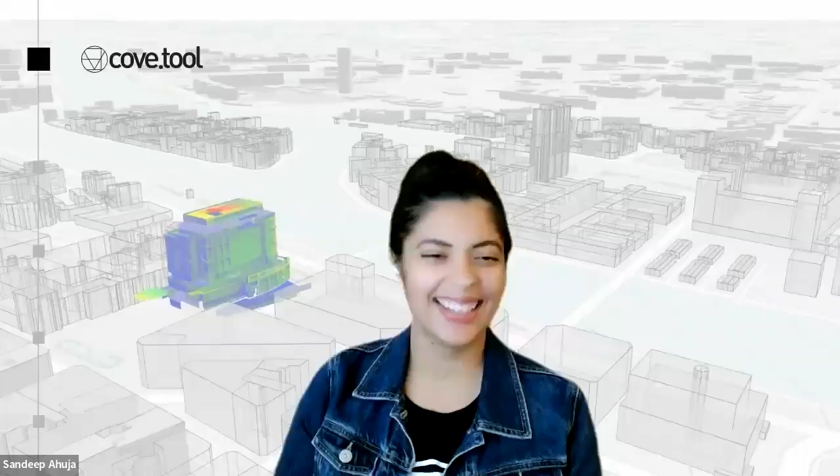That is short. I'm going to pull more out of you than that. Can you give us a little bit of your background before cove.tool? Depends how far back you want to go. I sometimes go all the way back to me being a diplomat's daughter, where I was basically traveling all across the world, all the different countries, went to Tanzania, Russia, Saudi Arabia, kind of all across the board.

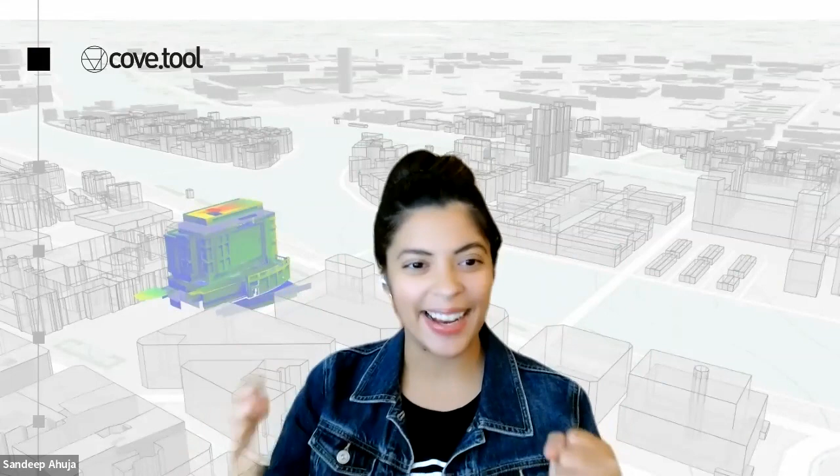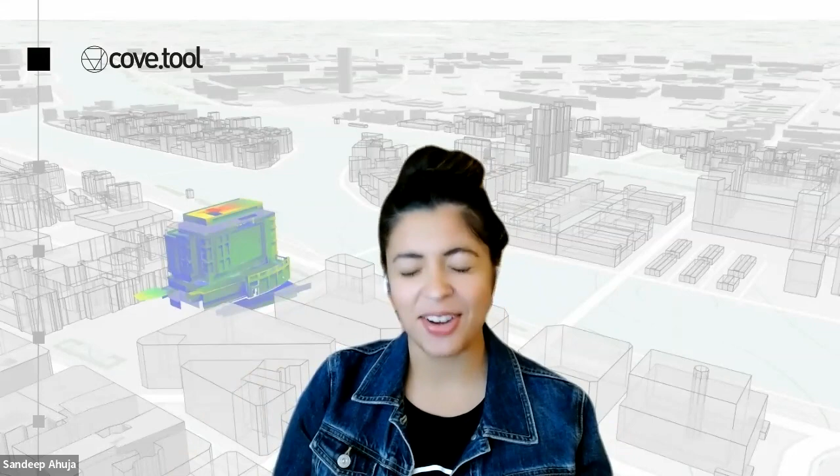That's really what all the way back looked like, and that created my love and passion for architecture. I became an architect, this wide-eyed architect so excited about everything I was going to do and all the buildings I was going to design, and practiced that for a little bit until I happened to sit in a lecture with the late Professor Godfried Augenbroe, who was visiting New Delhi at the time. He talked about how buildings were 40% of all carbon emissions, and I was like, wait, I went to school for 5 years and no one told me that.

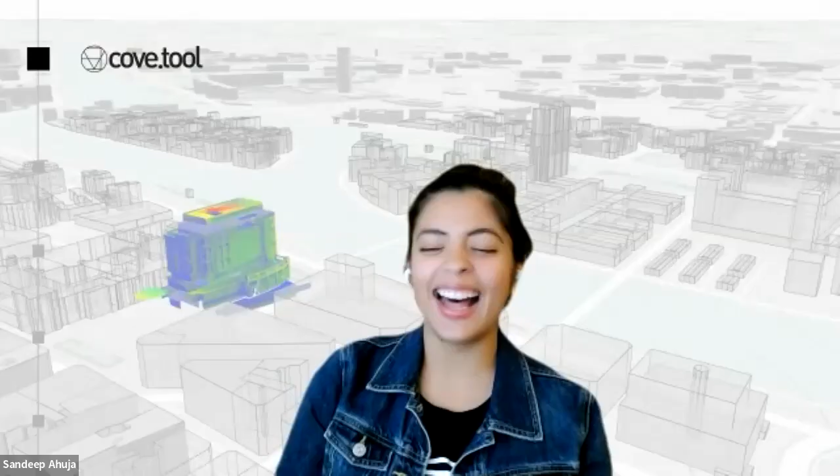No one told me that. So I just waited till the end of the lecture, went over to him, and said, hey, I think I'm going to apply and be your student until I know exactly everything you're talking about so I can go fix it. And he's like, well, give me, in his words, not a shitty application and I'll think about it. That's amazing, what a great response. Yeah, for anyone that's ever known him while he was still alive, that is a very free response.

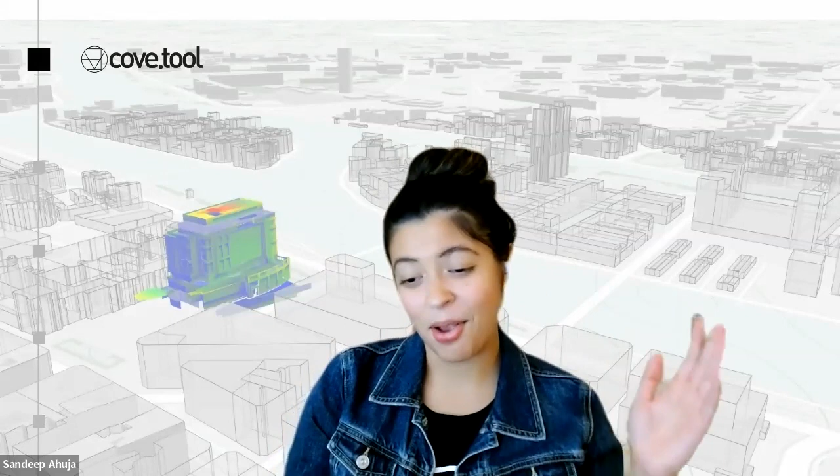All right, so then you did it, you gave him a non-shitty application. I gave him a non-shitty application. I became his student and I became an expert in all things building performance, which is so wide and so vague for anyone that's in that world. And then I went and co-founded the energy lab within Perkins & Will, which is one of the large architecture firms. That was fun, and we grew the team there.

While that was fun and wonderful, I was like, well, let's see what it's like to jump outside the safe bubble and do it outside of that. So then I started my consulting practice here in Atlanta, and we grew really fast. We had tons of projects, we were doing all of it. It was actually really, really good for all intents and purposes, like from me feeling great and making enough money, us doing enough projects, it was wonderful. Only I was not having the impact that I needed to, because 100 projects for a team of 10 is what we were roughly doing per year. I was not going to have the carbon impact I needed to have. So I was like, doggone it, I've got to change what I'm doing. And that's really what got me on the software journey.

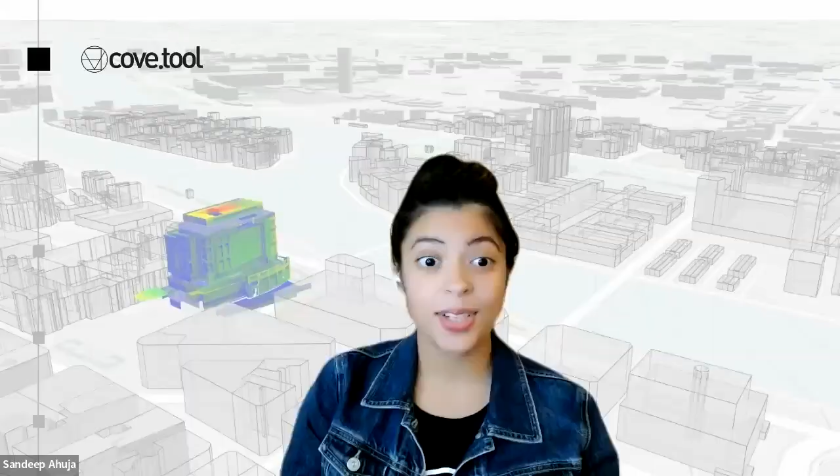Cool, very cool. Fast forward to today, you guys have how many people? Can you talk a little bit more about where the company's at before we dive into more of the details? Yeah, for sure. So fast forward 3.5 years, we are now 75 people, and we just moved into our new HQ in Atlanta. The interesting thing about that story, and it's not a long detour, I promise you, but when I was first starting my consulting practice, it was pretty fresh or green, or whatever word someone may want to use for someone who's new.

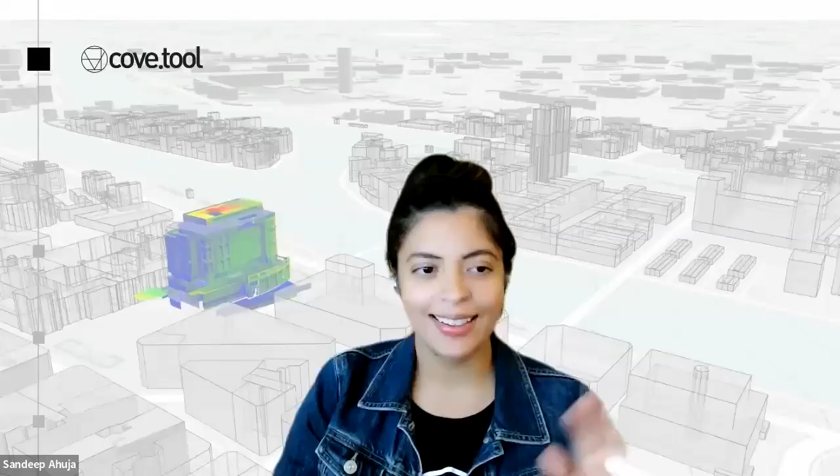When there's a new business owner, there's a lot of scam artists out there. There was this one scam artist who was trying to do a project, all kinds of stuff. He was like, 'We have an entire floor in the Equitable building,' which is a very reputable building in Atlanta. He said if I did this project, I'd get a whole floor. At the time I thought, one day I'll get there, but I do want a whole floor. So that is exactly where we're at now.

We just took the 5th floor of the Equitable building, which is pretty fun. And that only took 3.5 years, which sounds like a long time, but it's really not. In the startup world it feels like light years.

So I was looking a little bit at the company's background. It sounds like you just raised Series A from Robert Downey Jr.'s fund. How's it been meeting with Iron Man and getting to know him a little bit more?

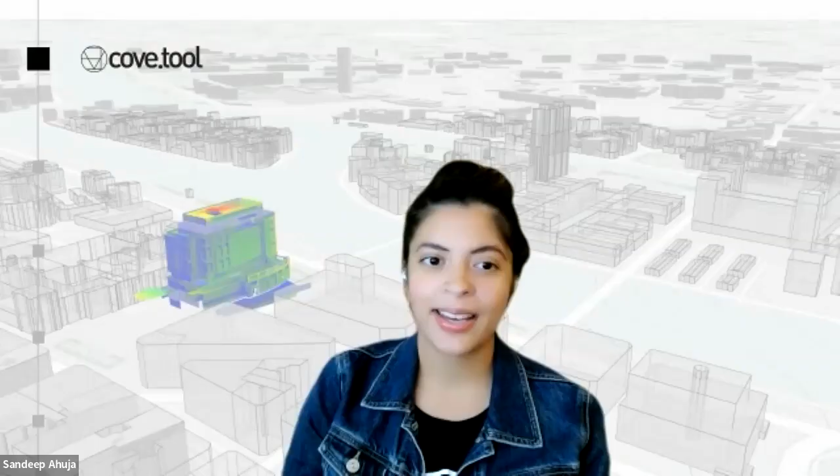Oh my gosh, I'm a super fan. I watch all things Marvel, I'm a big Avengers fan. Not only will I watch the movie, I'll then go watch the debrief of every 15 minutes of the movie to understand all the Easter eggs and all the things. Oh, you're that nerdy. Okay, just to set the stage, that's who I am.

So when I got introduced to Robert, of course it was a super fan moment, but I was meeting him in a very professional capacity because I can't just fan out and be like, 'Oh my gosh, you're the best thing ever, let's take a selfie.' I can't do that. I mean, I could, but it'd be really weird if I did.

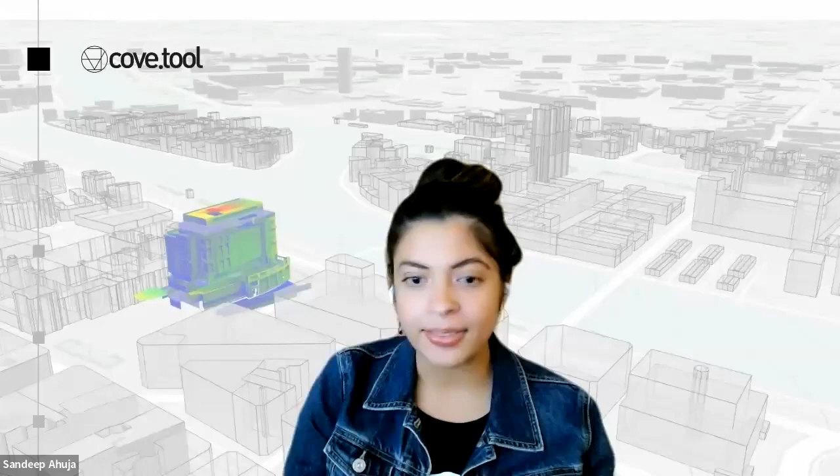So we talked about everything we were doing, and I learned a little bit more about all the things he was doing with Footprint Coalition and his focus toward sustainability. There was so much synergy in the impact that both his fund and our company were working on, that by the end of the conversation it definitely felt like this is something we're going to pursue together.

When I spoke to him, we weren't raising a round because we just weren't raising at that time. He said, 'Well, when you are, let's get in touch.' So when we were, we got in touch. Since we had already connected and there was so much synergy, and because we were growing so fast with all our metrics looking so beautiful, everything just kind of beautifully came together in like a week.

I was also researching the company and saw that your partner is your co-founder, your partner in life is your co-founder, and the other co-founder is his brother. Can you talk about what it's like to build this company and the family at the same time?

Talk about putting all eggs in the same basket, right? All around. Yeah, it's actually really, really fantastic.

Originally, me and my partner Patrick, who's also of course my partner in life, we've been working together from the moment that I've known him. We met at Georgia Tech. We did all our projects together. We went to Perkins and Will together. We started the Energy Lab together. We quit it together. We started consulting together. Ever since we've met, we've not stopped working together.

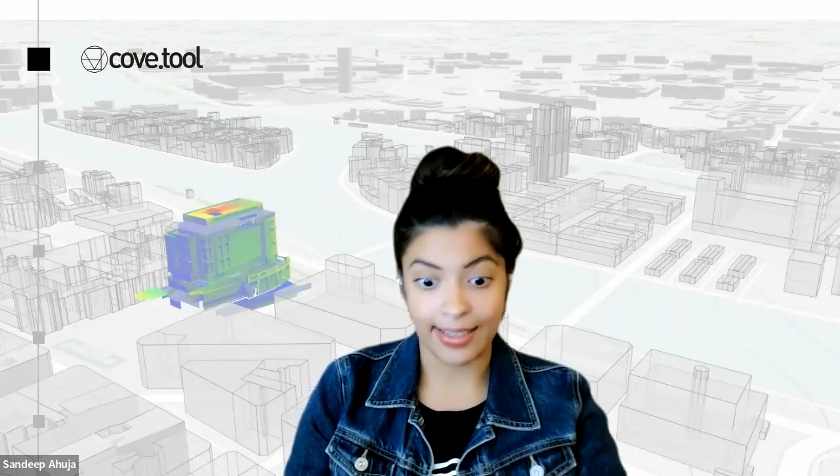We had to pitch it to Daniel because we needed a CTO. We needed a co-founder who was really, really focused on software, because that is not me, and that is not Patrick. We needed someone who could really build the app from the ground up and make it scalable. I mean, I can code, but it will break from time to time, and that is not the app that I needed to build.

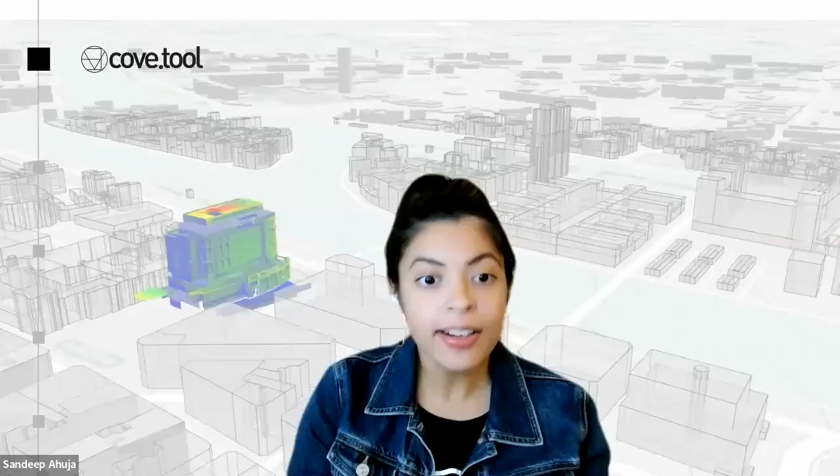So that's where we got Daniel involved. And it was not a great offer that I had to make. The offer that I had was, this is really big, it's fantastic, it can have world-changing effects on climate change. I have no money, but as soon as I do, I promise I'll figure out a way to pay you. And that is the offer that I had to make. And he really saw the vision, and here we are.

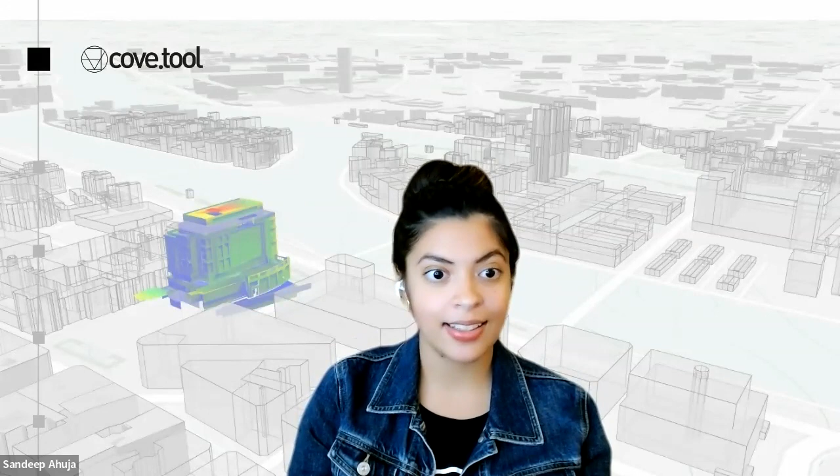Amazing. Very cool. Well, let's dig in a little bit. So we were talking before we hit record about, at one point in my career, I was doing full-time energy modeling. It's been a while since I built energy models, but I have to imagine that when I was modeling, cove.tool didn't exist, and I probably wished it did exist at this point. So I saw something around the automated sustainability consultant. You started this consulting firm and said, I need to scale what I'm doing, I need to affect more than 100 buildings. Can you talk about what automating the sustainability consultancy meant to you at that point, and then how the energy model process just wasn't scalable, and why you needed to build software?

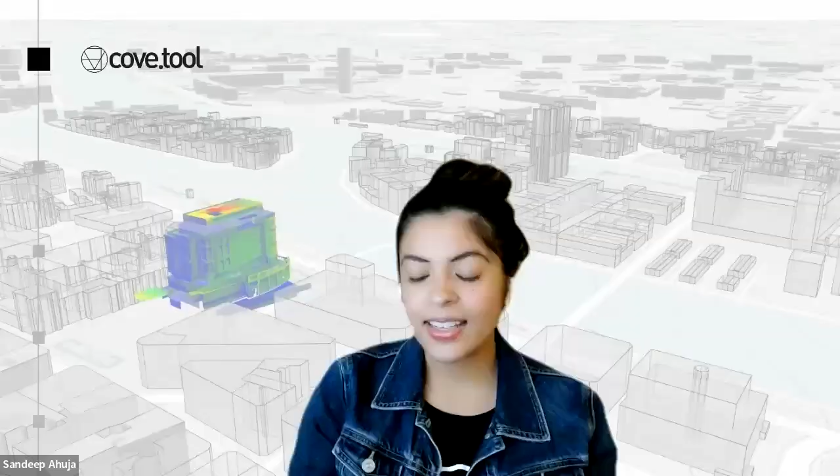Yeah, I can talk about how we even called it that back in the day, which has completely changed now. There's all these many different products that serve many different people and industries now, but let's go back to what it once was.

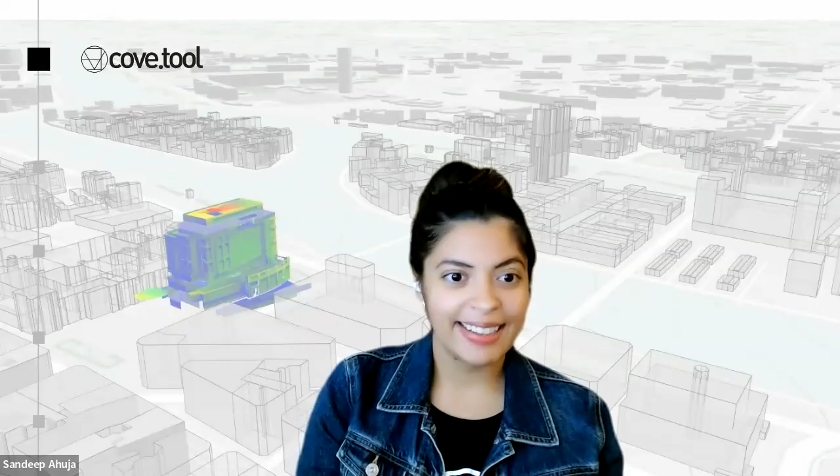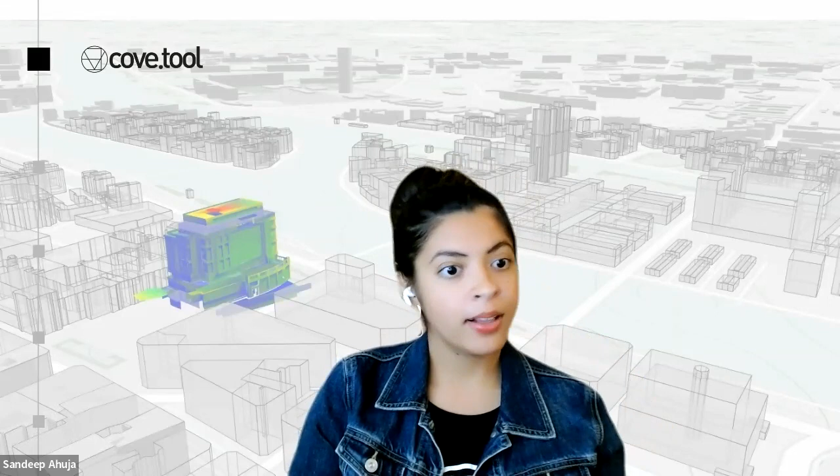It started out like, at the time I was doing taxes, and I was like, well, I used TurboTax. Not to necessarily endorse them, I'm not a sponsor, but that is the app I was using. I was like, this is a pretty complicated form, and I'm able to fill it out with reasonable accuracy. Sure, I don't know as much as a tax consultant, but for most cases, 90% of the cases, I'm good. The 10% of the cases, I'm definitely not good, and I will need a tax consultant. But that was really what I wanted to build for the energy modeling community, where for 90% of the cases, we can get pretty darn close. And when it's on that super complicated, super detailed, super peculiar case, well, go get a super expert. There's plenty of them in the market. Totally, and that was the whole goal.

The reason why I knew we needed it is because when I was growing my consulting practice, hiring was a real challenge. You hire an energy modeler right out of school, and you have to train them from scratch. Once you train them from scratch, you have to teach them all of these inputs. I'm like, why aren't all of these inputs just automated? Shouldn't someone automate them across the world so that it just pulls out the right thing? That's really where it was, because I knew it could be done, and I knew no one was doing it, and I knew I needed to democratize it. The only way to do that is to just give easy access to information. If it's that easy, then you have no excuse to not do it.

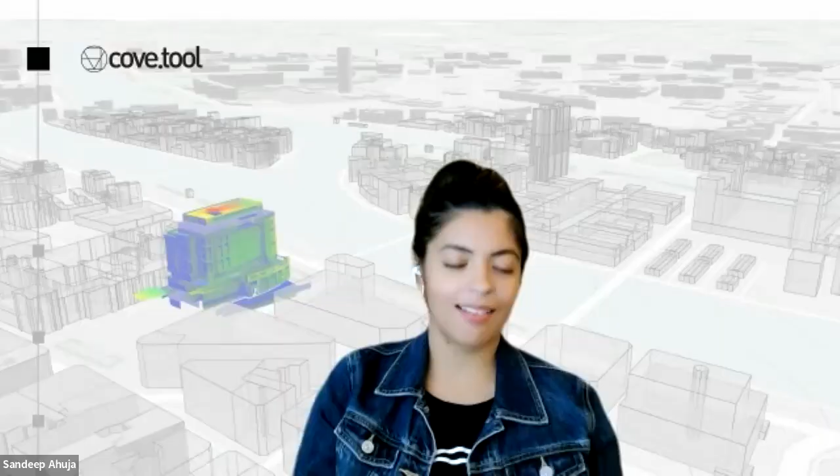Yeah, I remember I was self-taught. I taught myself kind of on my own time at night so that I could take on more responsibility at work during the day. And I remember I took this massive energy modeling one-week course, and they gave me this huge binder, and that was basically what you paid for. I mean, it was a great course, great to be in the workshop itself. Kendra Tupper was one of the teachers, and she's one of the most amazing energy professionals. I still follow her to this day, but she handed me this massive binder back then, and it was all the cheat sheets and inputs you're talking about.

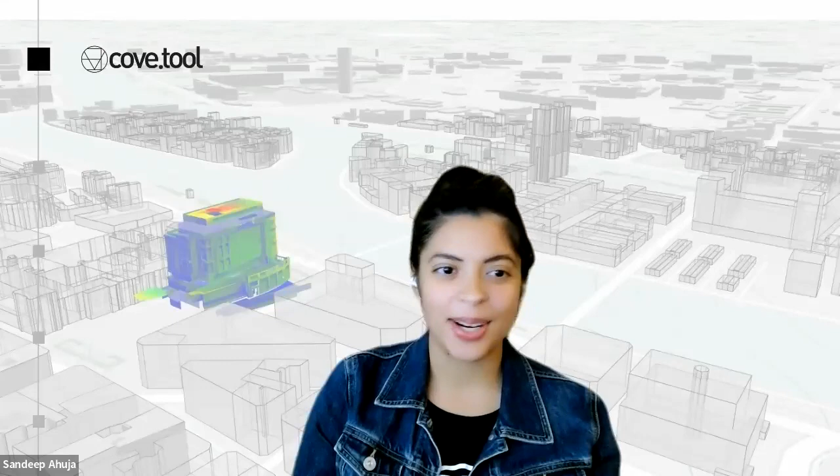Exactly, like basically learning how to use eQuest, which is what I was using back then. And it was like, why do I need all of these cheat codes? Why isn't it in the software? Why isn't it just doing it? Also, why isn't it more pretty?

I also built, once the energy model was run, all of these Excel workbooks to take the outputs and actually make better decisions based on what the results were.

So tuning parametric runs, I did all in Excel for a very long time. It's funny you say it doesn't matter, but it matters so much. We started with energy modeling, but now we've launched a load modeling tool, which is HVAC sizing for all mechanical engineers. There's all these ventilation calcs and really old Excel spreadsheets that everyone's been holding onto for the last 20 years, calling them their firm's cheat codes.

There's a feature called template. You can templatize it and use it over and over again. It's simple.

So these processes, basically the way I understand it is, what you guys said is, let's reduce the time, complexity, staffing requirements, and expertise required to get to this certain point in the energy modeling process.

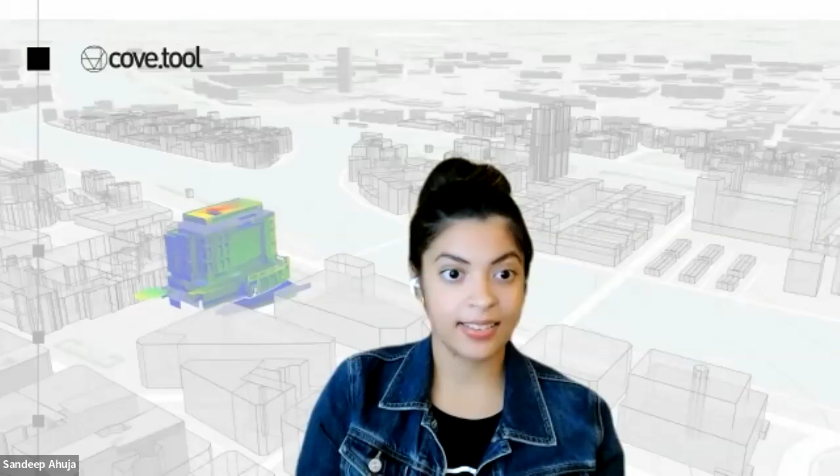So you basically launched the software company from there, when you were doing all this stuff on the consulting side? Yeah, that was basically it.

And when we launched the software, that's when we started getting a good bit of response, as you know, being from the same industry and space, people are pretty vocal. If something doesn't work, they have no problem writing a 10-page email describing what's not working, which I could not have been more appreciative for.

Because we had a whole bunch of beta testers, got tons of feedback, made the software better. It was like, yeah, that's totally a fair point. Yes, should totally keep that, good point.

And despite being more expensive than anything else in the market, we started selling it rapidly. That's when we realized: me, one person, I can do one thing really well at a time. I can either run consulting really well and keep all my clients extremely satisfied, or I can grow this software business. But if I try to do both, I'm likely going to fail at both.

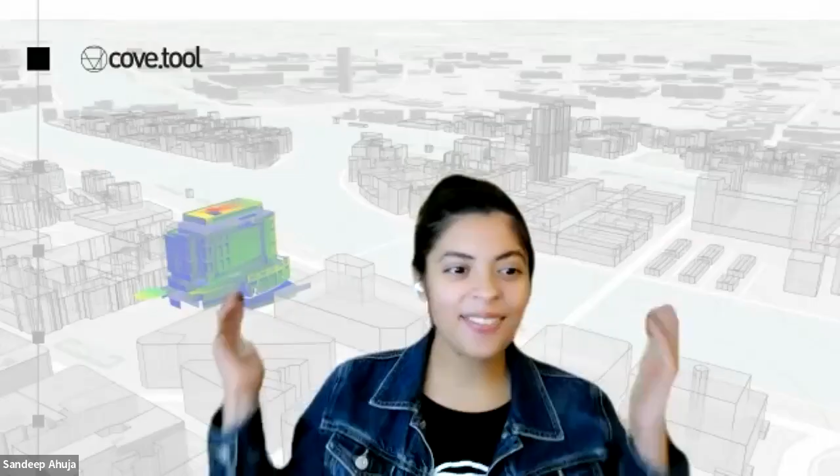I love that. I did the same thing about 6 months ago too. I had a full consulting practice and I said, I've got to focus on Nexus full time. So here we are, that's amazing. We have that in common. You've got to figure it out. Yeah, you got to figure it out.

Okay, so typically when I have tech founders on the show, they're talking about technology they sell to building owners. I'd love for you to describe selling technology to architects and engineers, and how that's different. It sounds like you're doing load sizing now, and building owners and contractors too, but you started out with architects, right?

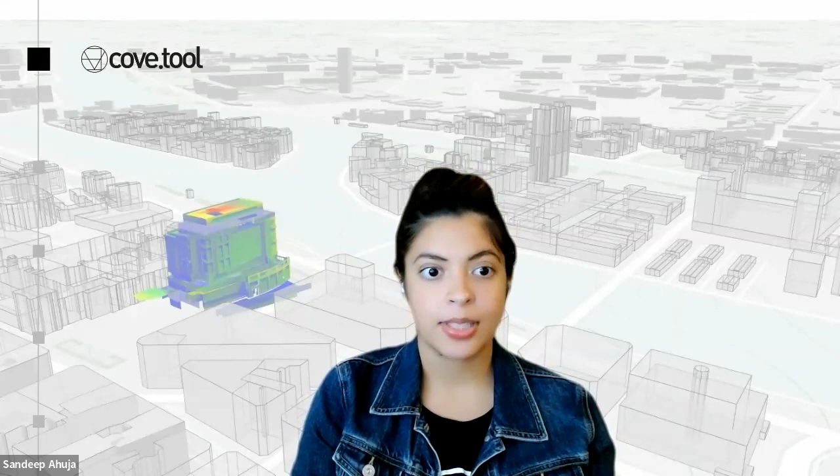We did. Back 3.5 years ago, we started out with architects, then engineers. Now we sell to folks like Skanska, Cousins, JLL. So it's kind of the whole gamut with all the different product lines that we have. Okay, so what was your original question?

What is it like selling it to architects? Well, I was just going to say, you started there because that was who your consulting clients were, it sounds like, right? Not really. I was consulting with owners and contractors too, even as a consultant.

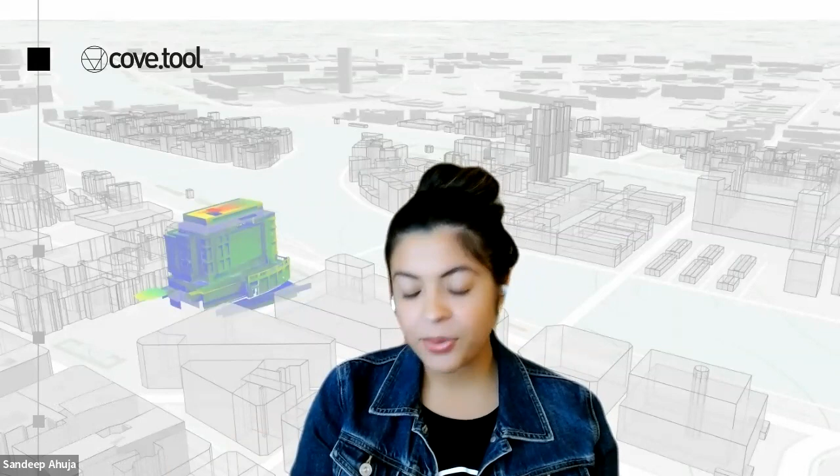The reason why we wanted to start with architects and engineers—historically, in the tech world, you might have already heard of this: that's a hard client to get, a hard one to get on your books. The reason I still wanted to go that way was because of the product roadmap. When I think about something like Revit, which is used predominantly across the board, like 40% of all projects use Revit, that's a pretty high penetration percentage.

We started out with architects because architects are the ones that control the drawing. They control the decision making around the project. Typically, they're the ones who will hire the mechanical engineer, though of course contracts can be laid out a different way. Typically, the engineers will use the same software for easier collaboration. And when all of your technical team members are using a particular software type, it's not like the contractors and owners say, oh no, we are the data experts, we're going to use some totally other software. It just brings that validation ahead of the actual usage.

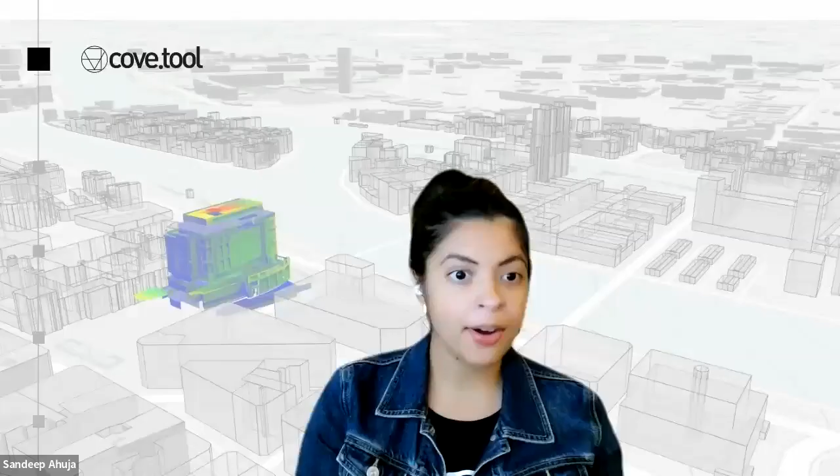Because now that we're the de facto tool for all architects and engineers, it's not really a discussion for owners and contractors. They're like, well, oh, AECOM, great, our architects and engineers are already using it. Oh, DLR, wonderful. HDR, great, they're already using it. So it makes perfect sense. It just makes the whole conversation much easier.

So I feel like while that is the harder route, it is the route that has allowed us to grow by getting credibility first and really establishing, hey, we have been vetted so many times you can't even count on your fingers. That much validation, because every firm wants to go through validation. It's been validated—it works across all of these different workflows that are all unique, that all use different types of software. And if it works for thousands of different workflows, we have some knowledge that it's going to work for you.

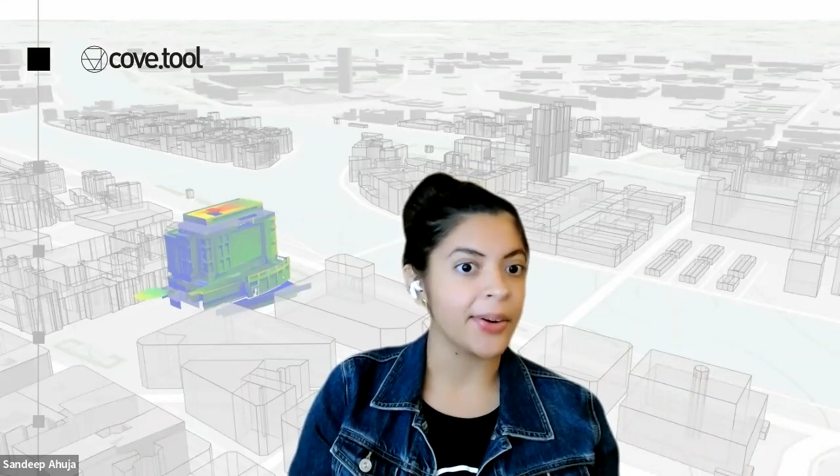So I want to key in on the architecture piece, because whenever I got involved in a project, I was working for a mechanical contractor at the time. I'm way down this progression that you just talked about, and typically there wasn't a model for me to piggyback on top of, which is why I was building one to begin with. Can you talk about why in the architectural process, energy models don't get built until later, sometimes not at all? Back then it was, we need to build them only if they were going for these certain LEED points or LEED credits. Today it's different, I feel, but I'm not involved as heavily as I was at that point. Can you talk about why it takes so long for an energy model to get built, if at all?

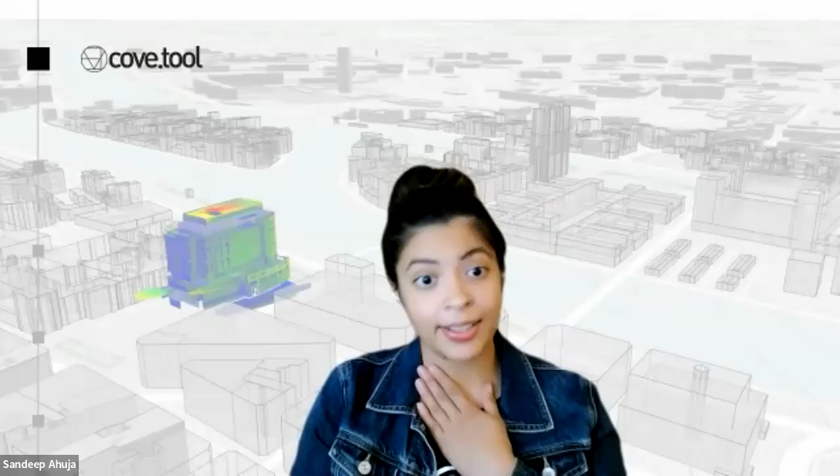I mean, in the old school ways, it definitely does take long. You have to collect all the inputs, you have to get the geometry into the model—my gosh, that is the piece that took me the longest. I used to use a different platform in my energy modeling career, and it only digested part of my Revit model. It digested none of my Rhino model and absolutely 0% of my SketchUp model. And if that's the translation I have from the platforms, and if I'm using ArchiCAD, I'm basically done for—I can forget about energy modeling altogether because nothing is compatible with anything. It just takes that much longer.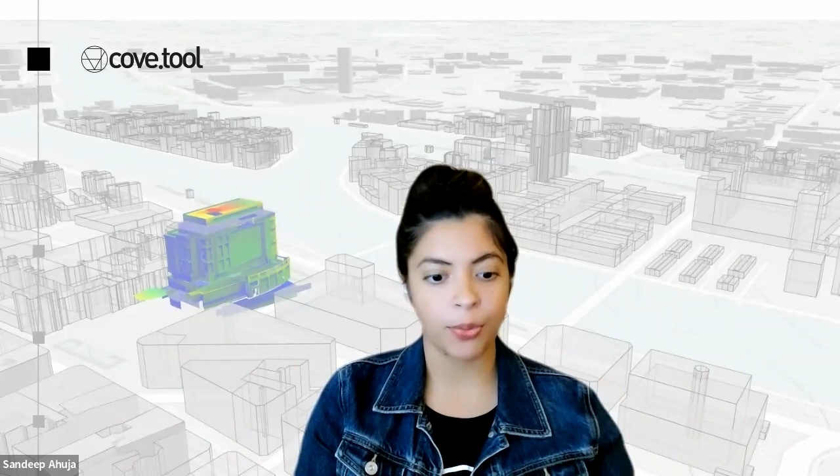So the first thing we did with Analysis Tool, which is one of our product lines, the energy modeling software within cove.tool, we made the geometry translation easy. You can bring in geometry from pretty much anywhere. Doesn't matter how pretty your geometry is, doesn't matter if it's perfect or a closed room, doesn't matter if all walls touch each other, which was a very common and irritating problem. It just works—it's designed to just do the job. So you bring in your geometry from any of the different sources, and then you enrich it with layers of information. You understand where this project is located, you totally know the context, you completely understand what kind of weather there is, you exactly know what energy code it's in, and you totally understand what kind of zoning criteria it has.

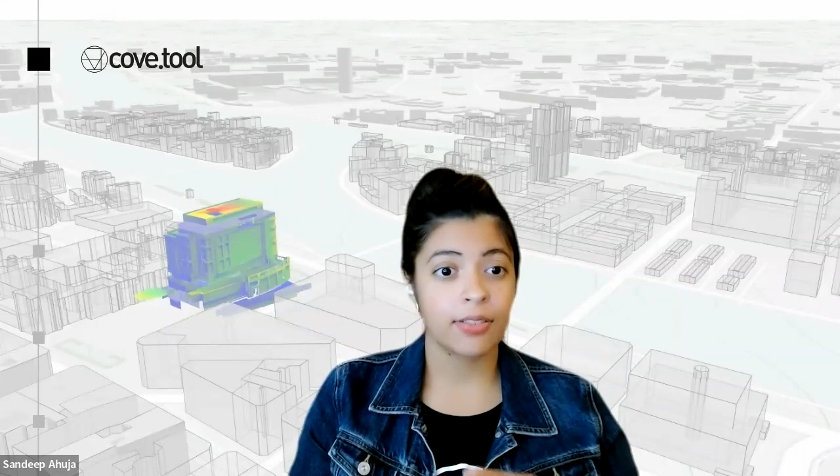Because we're enriching it with so many extra layers of information, things that took hours—like 40 to 80 hours—now happen in about 1 to 2 hours, because you're not doing rework. You're making smarter choices and getting smarter yourself because you can run it more often. If I had to test out 20, 30, 40 iterations, that would take a while. Now I can do that in about an hour, all included. That makes me smarter, so I can say smarter things about my project because I actually know them. I think that's extremely powerful.

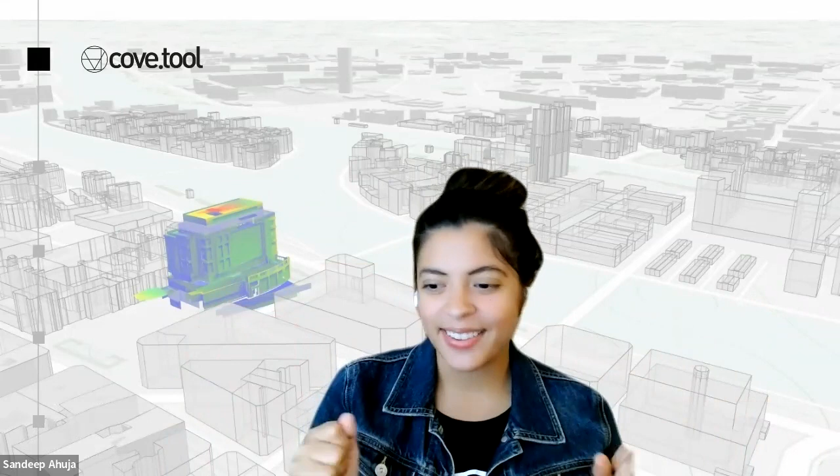I love that question because that's exactly how my brain works—thinking through the progression. One of the common sayings from my mentor was, you can't use a cannon where you can get away with a gun. Not that I'm in agreement with violence, or saying no to all firearms, but the analogy was hilarious—you've got to use the right tool for the right stage. That's really how we think about the entire product roadmap.

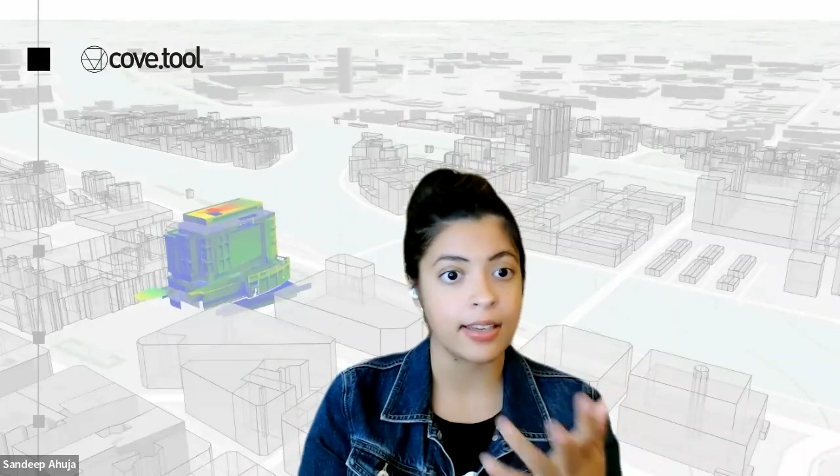So you start in extremely early design. All you're doing at that point as an architect is sketching—testing out different massing, testing out different shapes. That's really what the drawing tool is for, where it's free for all. There's no subscription, you don't have to pay anything to use it. You can draw it and export it out in any format—take it into SketchUp, Rhino, Revit, ArchiCAD, IFC. No matter what you want to do with it, you can take it out, but you can draw in-app and really get your massing going. So that's the drawing tool—super early, pre-design phase.

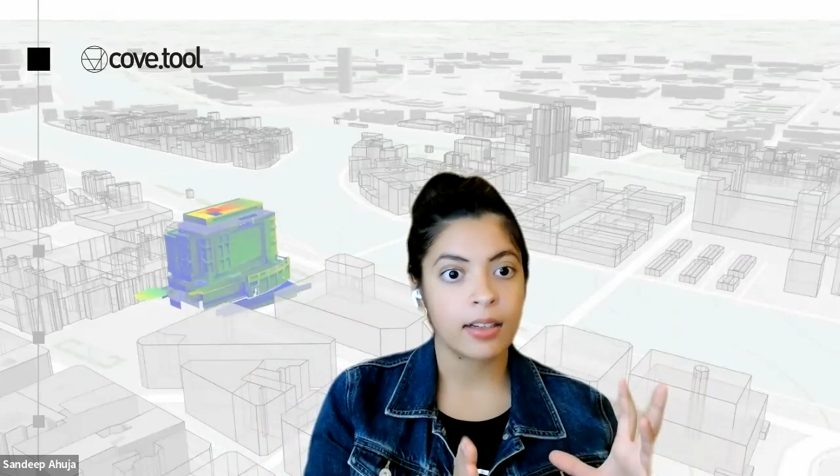Once you have something, you want to start studying it—understanding what's my daylight like, what's my radiation like, what's my energy, what's my embodied carbon, what's my operational carbon, all the different typology, what's my water use. You want to enrich it with that information so every time you change something in drawing tool, you can see that it changed your energy, your carbon, or your water use entirely. That's what the analysis tool is for—used in pre-design, schematic, concept design, early design development. More often than not, architects at the schematic design development phase will invite their mechanical engineers or energy modelers if they already have them on board, which in many projects, as you know, is not the case.

They'll invite their engineers to the analysis tool collaborative platform, because it's 100% collaborative since it's on the cloud. They'll say, here's the automated inputs, do these look correct? Do you want to adjust them? Do these numbers look right? Can you give it a gut check so it doesn't take them too much time? Give like, okay, this feels about right, or oh no, this ventilation number looks totally off because we're doing something completely unique and we can't use the automated input.

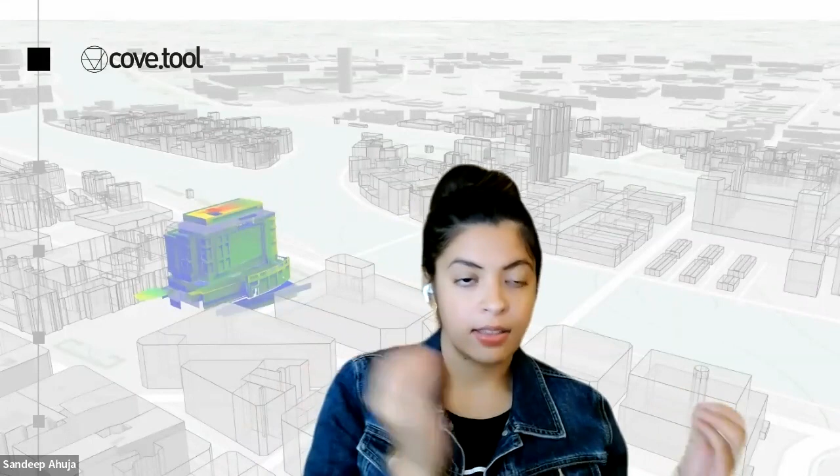Whatever that may be, they go through that in the schematic design development phase and really move through the optimization, where they're running thousands of iterations to find the absolute lowest cost way to get to their energy targets, whether code minimum or high performance targets, whatever those are. Once that's done a few times, which happens quite a few times through schematic and design development, depending on the team, they may do it once, they may do it a couple times.

They can actually export directly out for code compliance modeling with Open Studio, which leans very heavily, thanks to the support from Department of Energy, on the Energy Plus model. And we've built that collaboration and integration with it.

All the while that detailed energy modeling is happening for compliance, you can also go in with your detailed load model and really run your 8760 model for the full year, which will get you all the way to construction drawing. It's kind of the first time, because I missed this in my previous life when I was a consultant myself - why do I have to always switch software from early design to compliance design? That was a pain, it took my team a bunch of time, and frankly I didn't like that because I wanted to be more profitable. So it bridges that gap for the first time, so we don't have to waste all that effort we make early on and then start again later.

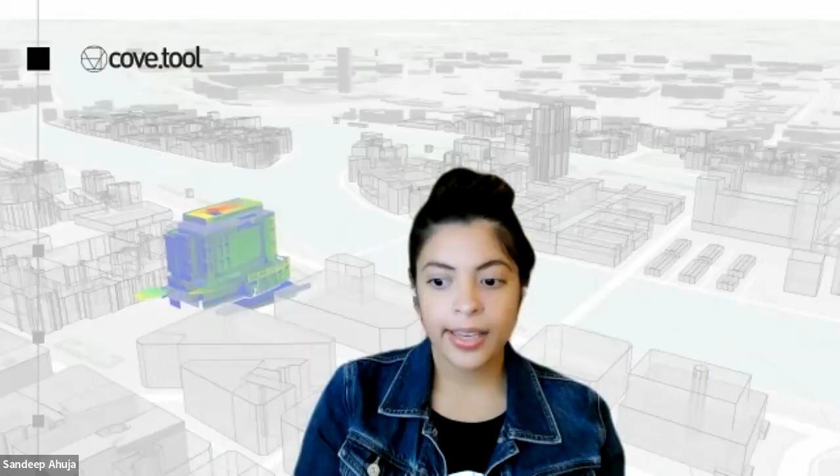Absolutely. How about when you get into handover and operational phase? What are some of the uses, and what's an energy model detail like then? So from a handover phase standpoint, of course, it's still that compliance level.

We typically haven't dabbled much in the post-occupancy or operational stage. Of course, an Open Studio model is an Energy Plus model, so there's no reason one couldn't use it for that after a calibration has been completed for operational purposes. But of course, that would require a full calibration by an expert. That is not automated yet.

Not yet, totally. I also had Excel workbooks for that as well. I could pull them out if anyone wants to create a SaaS company out of that. There you go.

So you mentioned all these different parts of the product. Can you talk about all the different things you guys have built over time to make this process easier? What's interesting is it sounds like you're selling these different features to different stakeholders in the process. Can you talk a little more about that?

Yeah, absolutely. If you think about the optimization piece, that's where you're really hitting the nail on the head, because you have a project budget, you have your energy goals, whether self-imposed, LEED imposed, government imposed, wherever these goals are coming from. There's some goals, unless you're in a select few states that have no regulations. But most of America and most of the world, there are energy targets you have to get to. And there will be more over time.

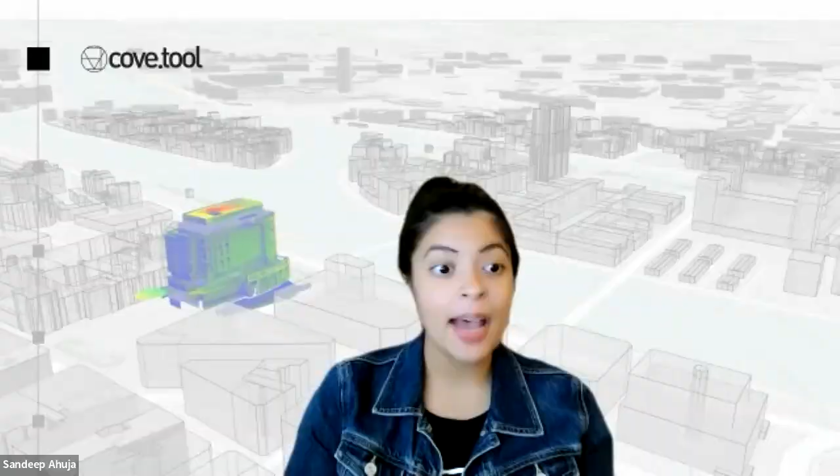Exactly, and it's getting more and more stringent across the board. Even if you look at Atlanta, where Georgia's not known to be the most progressive state, we just went through a major overhaul last year where our energy targets now require us to be 40% more efficient than just the year before - that's a big deal. 40% is a really, really big deal. And that's happening across the board, no matter what state or location you're in. So since energy codes are definitely getting tighter, and even if they're not, they already exist pretty darn tight, and there's a project budget we have to get to, now it's all the variables in the middle.

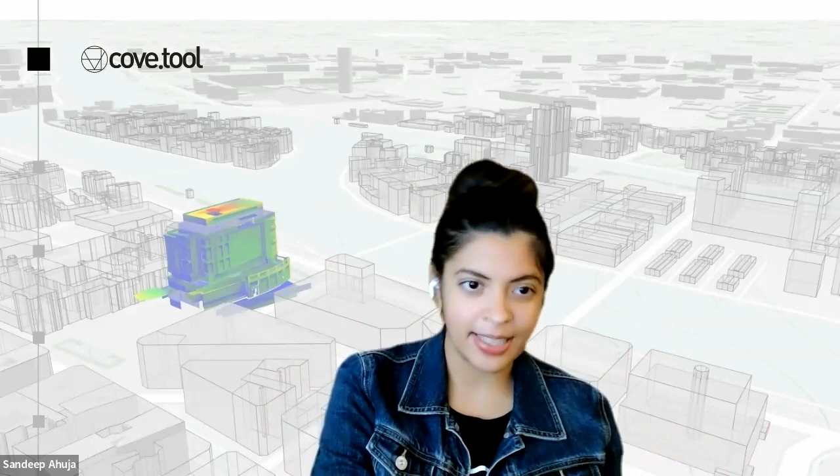How do I match these two? How do I get to these codes with this budget while getting all of my design, while making sure I get my square footage, while making sure my building is wonderful and great and leasable if it's an office building or whatever. Those are the decisions where developers find the most value, where they're not necessarily trying to do the optimization themselves, but get a quick gut check and create a nice collaborative workflow.

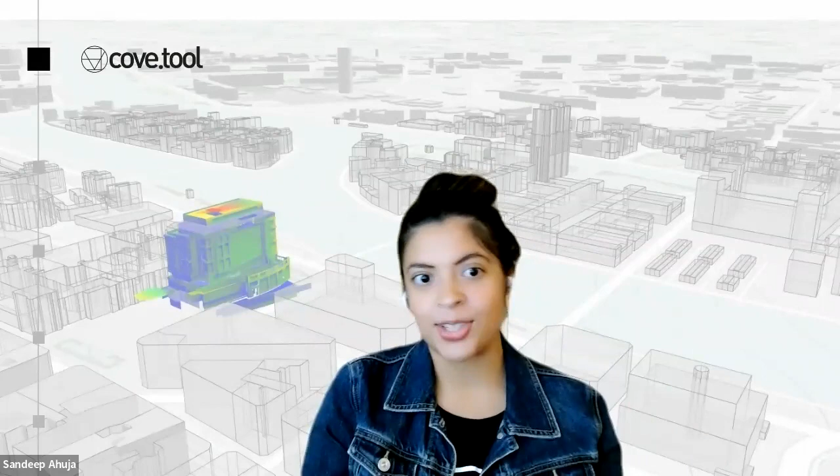For example, if I'm the project manager at Cousins and it's my job to build this office building for this project budget, hit this criteria for energy, and I tell the architecture team, hey, test out this glass type, and they say, oh, it doesn't work. I don't have any visibility into that. I don't know why it doesn't work. What does that mean? Do we need to change some other variables?

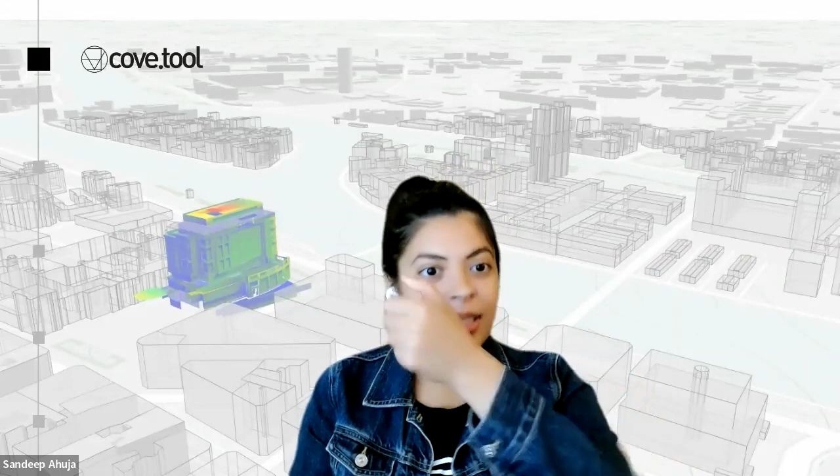That's really the clarity that the cost optimization provides, where you can list out all of the variables. I can look at 5 different types of glass, 10 different types of insulation, different mechanical systems, although that's typically not up for debate for some developer-driven projects. You put all of the variables that are up for debate and figure out exactly, transparently, the lowest cost way to get somewhere, and know that as a team together.

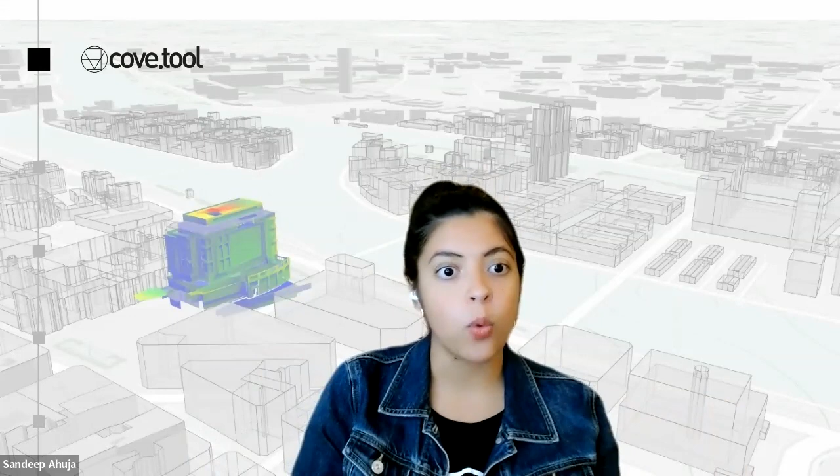So when the architect changes something in the geometry, the design, the shape, or what have you, it trickles down and you can see, oh, that thing we just changed also means we're going to need to change our mechanical system. It also means this optimized solution we had is no longer the optimal solution. We actually have to add a few sensors here or what have you. So it creates this interconnected web of information to really empower smart decision making as it relates to the budget, which I think was critically missed for, forever.

Yeah, and I'm picturing in my eQuest days taking a model and sharing it with someone to get their feedback. That was not even possible. That would be fun. Try sharing that to an owner. Oh my goodness. Oh my God.

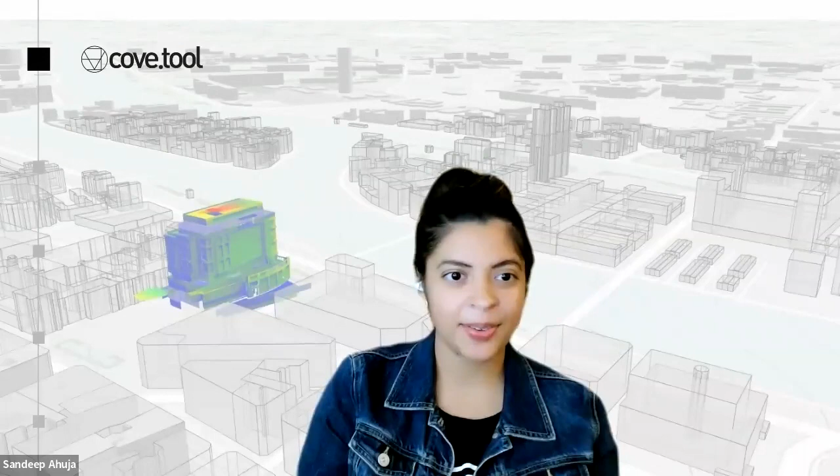Yes. So in today's world, you said office buildings, let's use that as an example. They have regulations hitting them, they have tenants getting more stringent around what experience they need to have, and the landlord's sustainability performance. You have employees deciding whether they want to go back to work or not, right? I'm not trying to go back to the office. LPs are down their throat, right, with sustainability. So the ability for them to have this collaboration engine and optimization engine is really what it is. I need to optimize for all of these different factors.

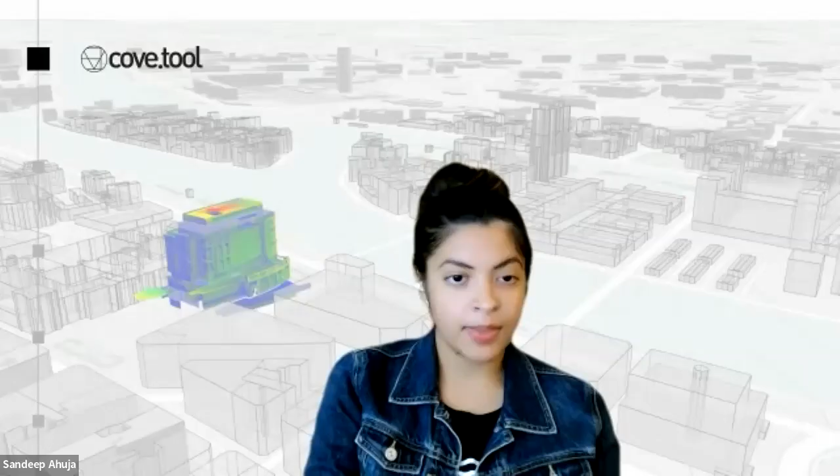That's awesome. Tell me about this cost database, because you guys built out this code database, this system database, this materials database, I'm sure, to be able to optimize for embodied energy and things like that. And we also partner with manufacturers for the materials database. So we have partners like everything from a glass manufacturer like Solarban, to an insulation manufacturer like Rockwool, all the way to a mechanical ventilation manufacturer like Inverid. So it's all varieties of products that affect building performance.

We're partnered with them, so not only do we get accurate data on the performance, which of course we validate, but also their current cost, whatever they're wanting to put out there in terms of cost. Of course, we're not quoting products, like if they actually give a different proposal, that's perfectly fine, but we even add transparency into that process.

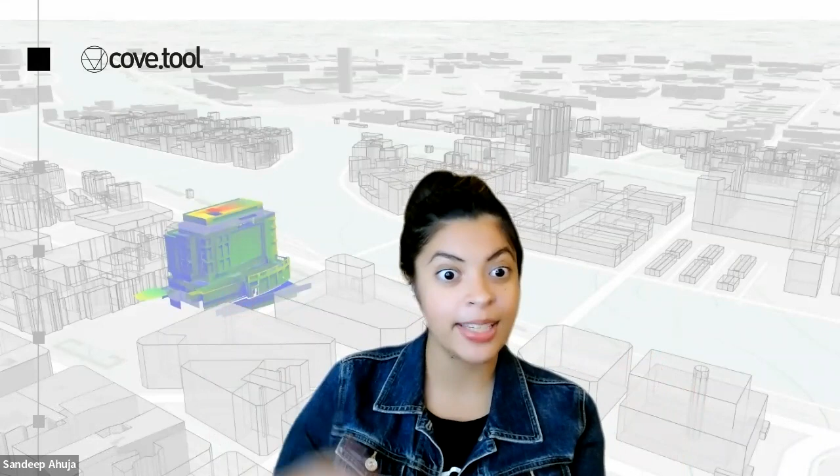So after you run the optimization and you learn that, oh, this particular ventilation system is the right thing for me to do, right then and there, instead of having to call a bunch of people, you can say, hey, can I get a quote on this? And then they can make you a real-time proposal on your project because you can share and connect that information through and through. That's cool. Not super sure if that's where your question was going at all, but you talked about materials and I just got going.

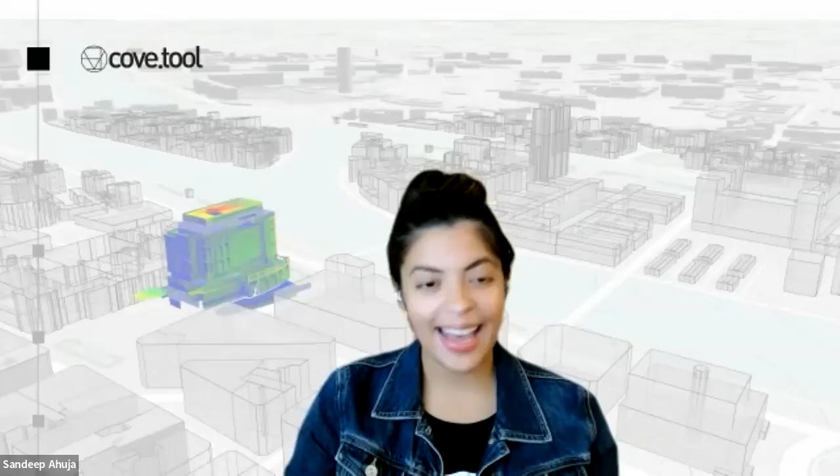So that's like equipment and materials costs. What about figuring out the cost difference between this system installed and that system installed? How do you guys accomplish that?

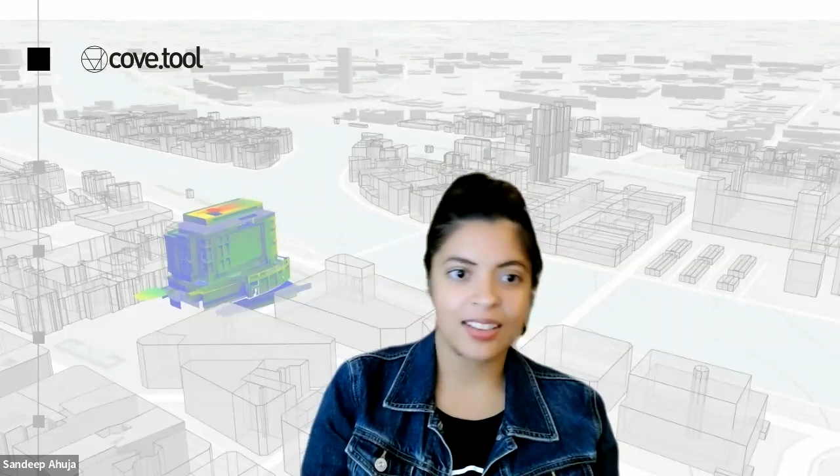In terms of labor costs, we definitely have a database that we've created. We lean on industry standards like RSMeans and our strategic partners across the board, but we all know those can be good and bad depending on what it is you're looking at. We've got to be pretty real about that.

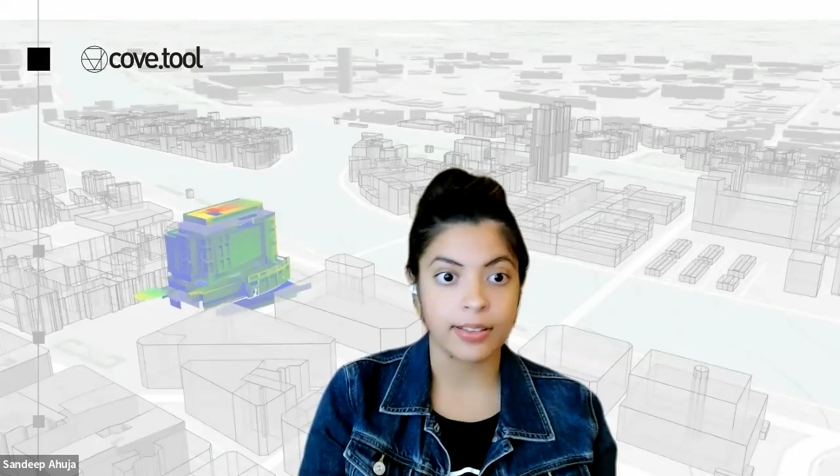The way we've set it up is for a really solid apples-to-apples comparison until you have a cost estimator. So if you've already hired a cost estimator, or perhaps if you're collaborating with your pre-construction team—which I strongly support collaborative workflows—just invite them into the platform and they'll add actual real-time values. In markets like these, there can be giant bubbles that won't be within any set database, even though we run quarterly cost surveys and have an in-house team that runs QA and QC on all our cost information to make sure it's valid, accurate, and makes sense. These are certified cost estimators, but we allow teams to go in and enter it themselves because that information is so variable.

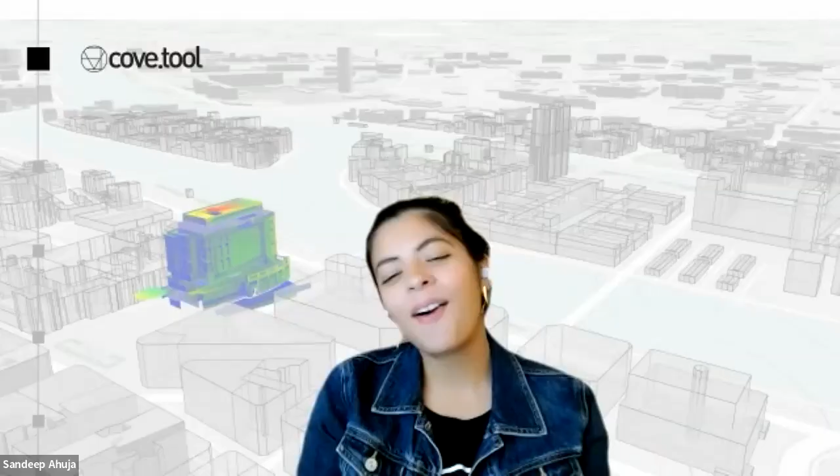Yeah, totally. This is another Excel spreadsheet that I had, by the way. You have all the spreadsheets. They're probably totally—you can't even open them now because they need to be updated with the latest macros or whatever. But yeah, I had all of these.

The reason I'm so excited talking to you is what I was doing was really important at that time. I was trying to convince people to make a different decision than they were planning on making if I wouldn't have been doing that energy modeling, right? So what you're doing is making that easier, quicker, more collaborative. I'm super excited, that's really awesome.

Thank you. You mentioned you guys haven't gotten involved much in the operational phase. I'd love to hear your thoughts. There's a lot of hype around digital twins and operational phase software platforms, right? In fact, that's a lot of the topics we discuss in this podcast—usually, how do we run buildings more efficiently?

I'm wondering—so there's that hype, but there's also a lot of research papers. During my time at NREL, there was a ton of just, here's how we can use energy models in the operational phase, blah blah blah. So I feel like there are those two ends of the hype, but if you actually look at the number of energy models being used day-to-day in the operation of a building, it's probably very small. Can you talk about your thoughts there?

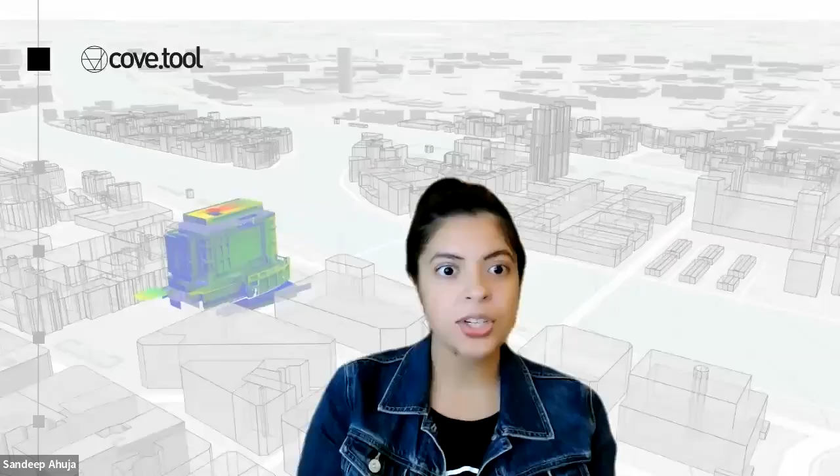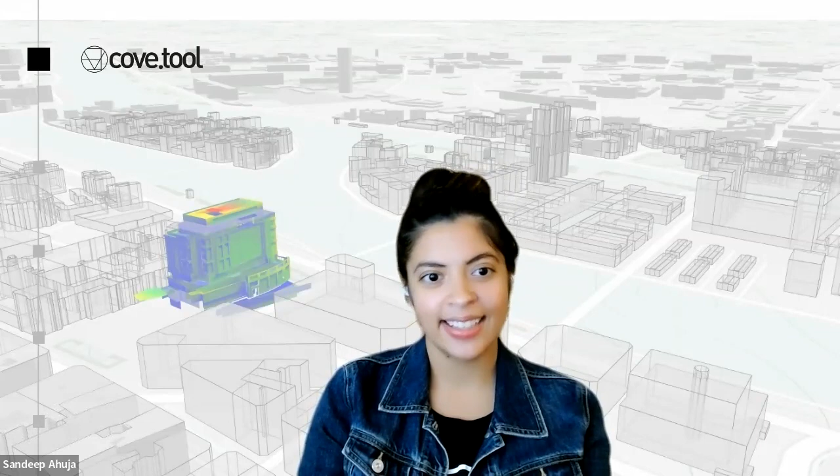Yeah, for sure. The way I think about operational and the digital twin hype, I think it's meaningful. The way we've chosen to tackle the problem, for a very specific reason, is the design phase, because I'm a firm believer that you solve the problem before you create it. I don't want us to create awful buildings, build them, and then figure out how to run those efficiently. I'd much rather us go down the path of designing great buildings.

And then, of course, it begs the question: well, what about all the buildings that are already here? Well, of course, you absolutely still need to do all this optimization for renovation and retrofit projects too, which, by the way, we do tons of—but it's still about solving the problem before it becomes a problem.

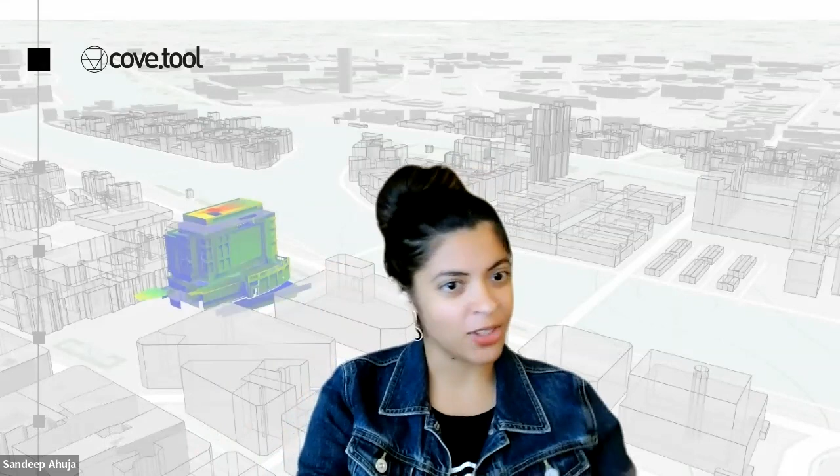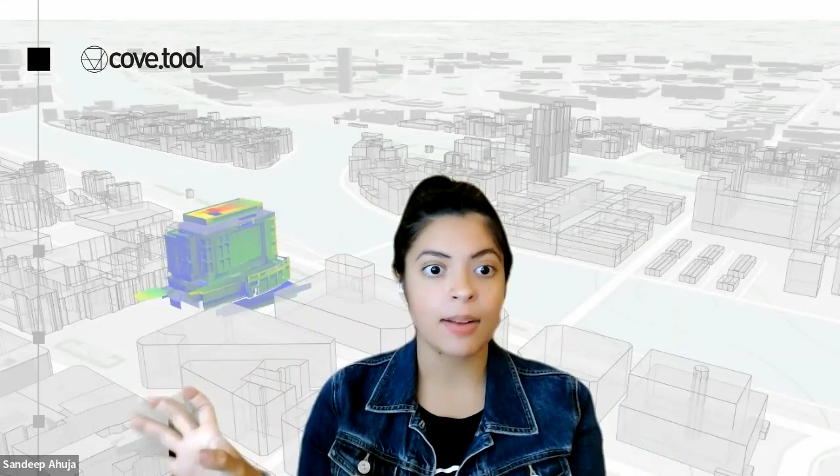It's like insulation, right? I want to put it as close to the outside as possible to stop the heat before it comes in. I'm not going to put a layer of insulation two feet inside my building and say that should do the trick—collect all that heat and tackle it later by just sizing up the mechanical system. That's what I think happens when we focus predominantly on the operational side. Not that it's not a big problem, because if it's already built, which a lot of buildings are, we absolutely have to fix how to run them better.

But a majority of the buildings are going to be built from now until 2050. I'm currently focusing 100% of my efforts on the ones that are coming, just making sure they come out better, so we give the digital twin guys an easier time.

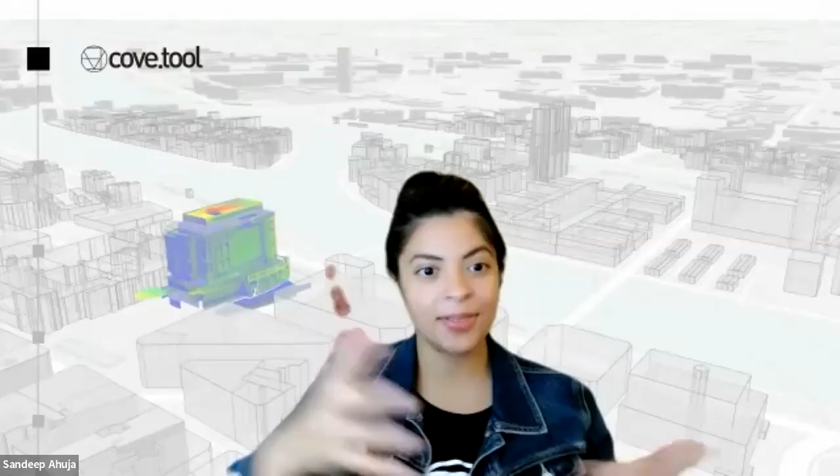There are so many great players in that space that we have an open API for, so we can collaborate back and forth, create easy communication and solve data challenges together. If they need information like what was modeled, we can show exactly what was modeled and connect that gap. That hasn't existed before because nothing has an open API, but we do. So you can take your data from the modeling phase to the construction phase to the digital twin phase for the very first time, and see that loop all the way through.

You can finally start answering, how accurate was the model? Why wasn't it accurate? What could we do differently next time? How can we as operators and owners get smarter in our next model, because we know how we build and we know how we operate. So that's definitely possible through the API, but we're not personally pursuing it.

Yeah, I love the transparency and thinking. Thank you.

There's so much opportunity there though. I feel like I've been doing a lot of writing and speaking recently on this next phase of operational decarbonization technology, and a lot of the opportunities are in how we can create better and easier lists of retrofit projects for people, how we can help them make better decisions. That whole section of the journey is all enhanced, or even just possible, with an energy model. So I feel like that has to be coming at this point.

Hopefully people don't build new energy models when you guys already have one built. Yeah, I mean, that's what the API is for. That's what the API is for.

Let's connect it. Okay, I think my last question is around what's next in energy modeling, and I'm going to kind of lead you. I feel like what's next is helping make better decisions around electrification. Is that one of the areas where it's becoming more important?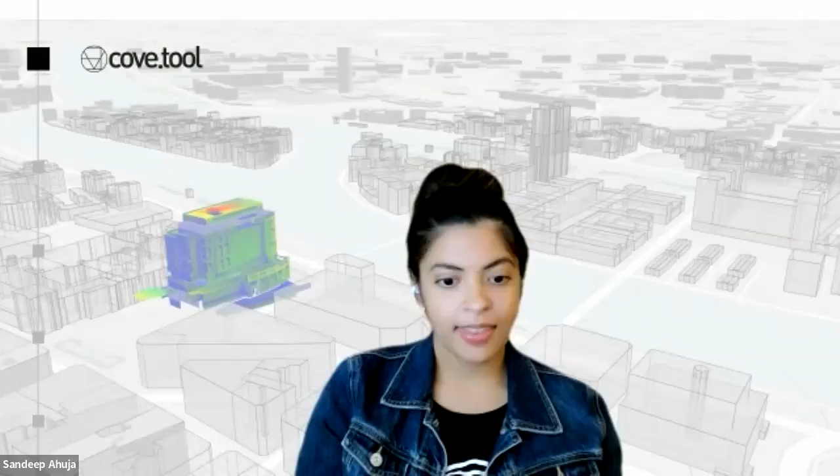I mean, I think electrification has been important for many years, and it should have been important long ago. That's already a given in my mind. We're already focusing on that, we already need to be focusing on that. I really think the next big thing, or at least I don't know if that's the next big thing, there's a series of things we all absolutely need to be doing for this world to have a fighting shot to bend the curve on climate change. Because knowing your background, you probably follow the science as closely as I do. We don't have that much time left.

So I really think that the next big movement is interoperability and connectivity, and that is exactly what we're focused on. The reason is, yes, energy modeling is super critical, super important, but not as a standalone.

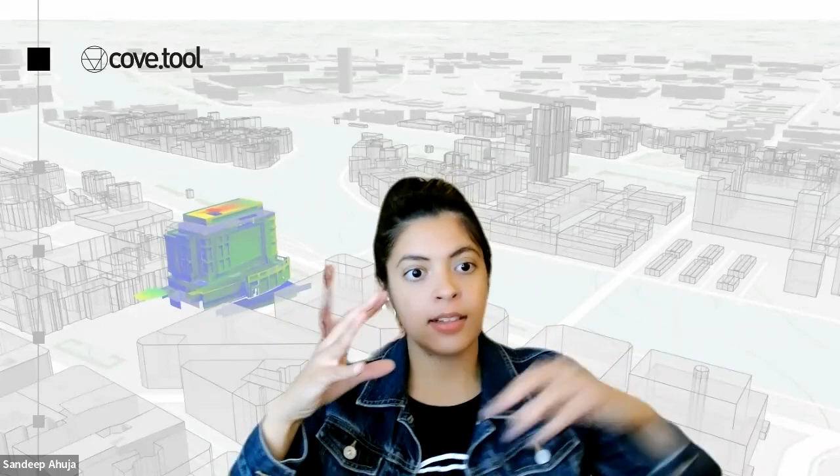Energy modeling is almost meaningless if it's not plugged into cost estimation. It's pretty much meaningless if it's not plugged into the agendas that architects care about. No one cares about energy modeling if it's not plugged into the agendas that the developer or contractor cares about. I think creating that collective circle of the network, interconnected information that enriches each other for better decision making, is where it's headed. It's not 'let's do design, oh, let's also do energy model.' It's 'let's do design together' — that's what's next.

Love it. And it seems like you guys have been thinking about that from the very beginning, the way that you built the tool.

I want to circle back on electrification because I'm curious how an energy model can aid in that process. Maybe a little more context: when I'm trying to electrify my home, and it's not a good payback at all to do that, I need to optimize for other things. It's really difficult, even for me, someone who has built energy models for a living, to figure out what my actual return on investment will be.

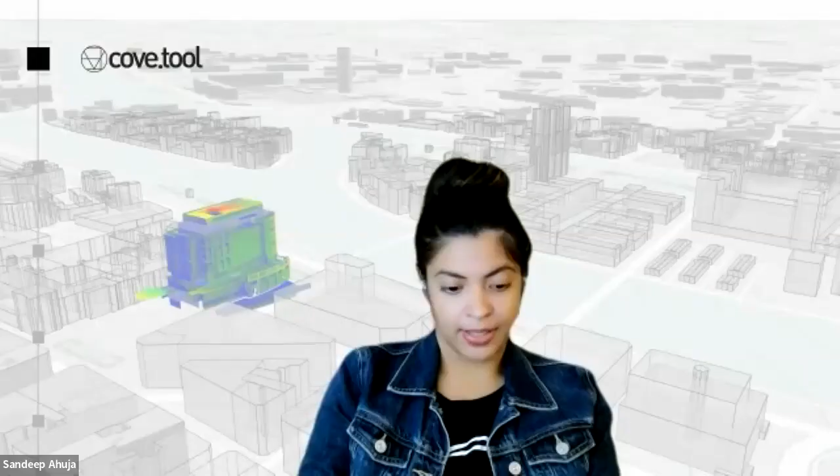So can you talk a little bit about how electrification can be easier with energy modeling? I think it depends entirely on the objective. If the return on investment, and let's say there's a carbon tax, the equation starts to change. There's other ways you're thinking about the premium you put on your future, and many portfolios, like the largest LPs and real estate developers, have started to put value on the investment and the risk mitigation. So as you put more dollar multipliers and factors into it, the calculation absolutely starts to change.

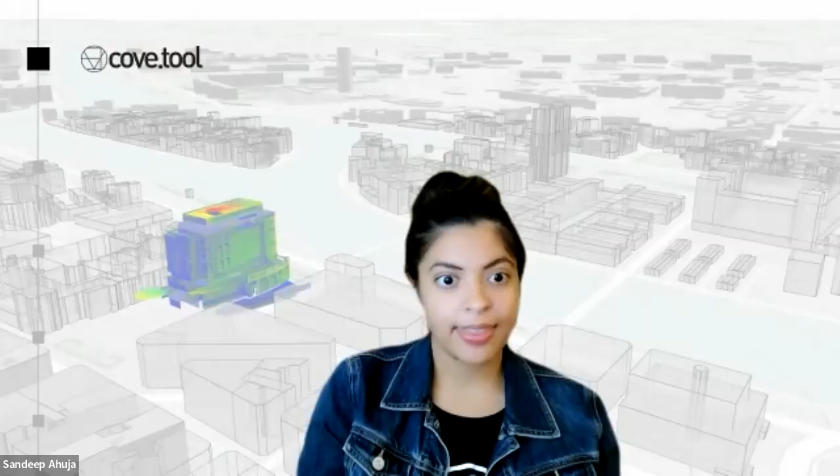So as we're thinking about the net carbon that it's causing, not just the site but the source carbon, and then if we keep zooming back and run the optimization with the source carbon, I think that just makes the whole calculation a little bit easier. And I think that's where an energy model can help.

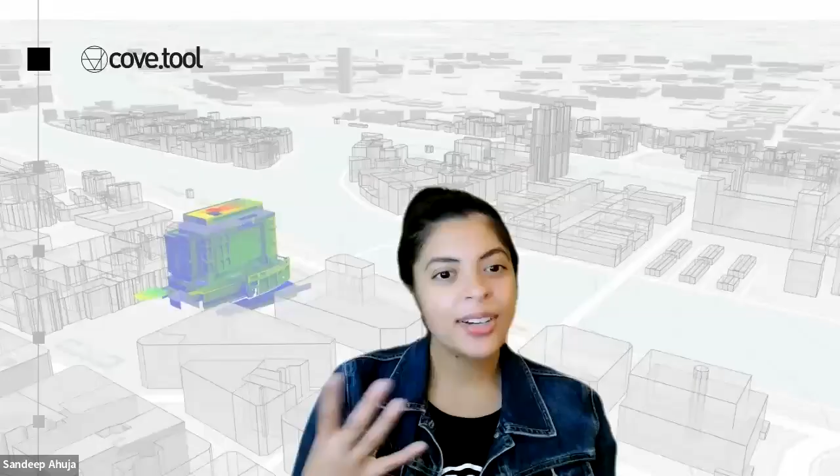Love it. All right, let's end with Carveouts. But first of all, thank you. This has been super insightful, but also a little bit fun. It's a little bit like therapy for my past self, so I'm feeling like I'm sending vibes to my 23-year-old self. And I rarely get to geek out on this level, James. There you go, I rarely get to geek out on this level. This is so fun. That's awesome.

Cool, so I like to end with Carveouts. Are there any books, podcasts, TV shows, movies, what didn't I name, that you'd recommend personally or professionally that people should check out?

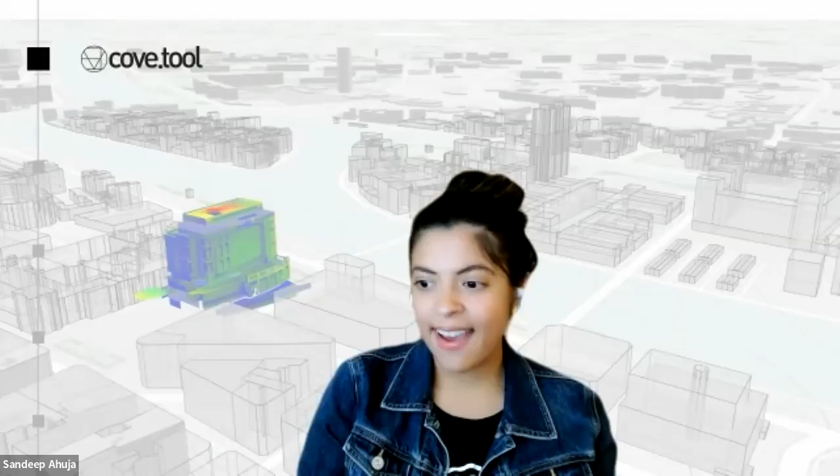Yeah, it was about a month ago, I read this really awesome book, it's called Amp It Up. It's from, I want to say, the CEO of Snowflake. I forget his name, but I'll send you the link after this. It's fantastic. For anyone that's building a business, like yourself or myself, I think it's just a really, really cool book.

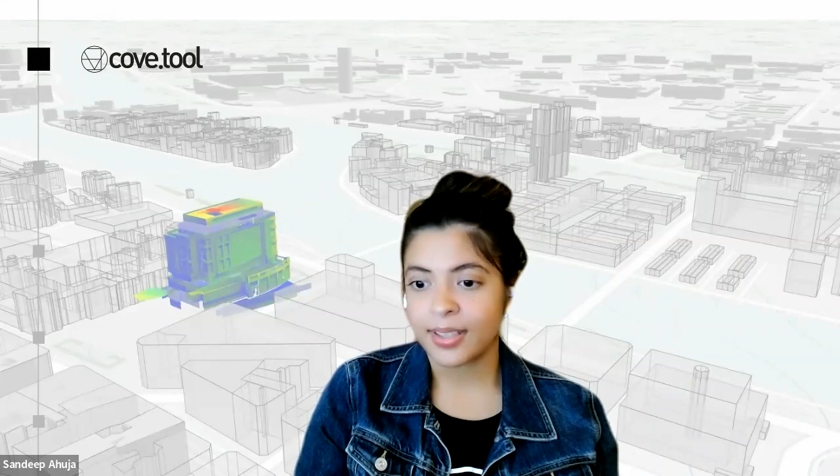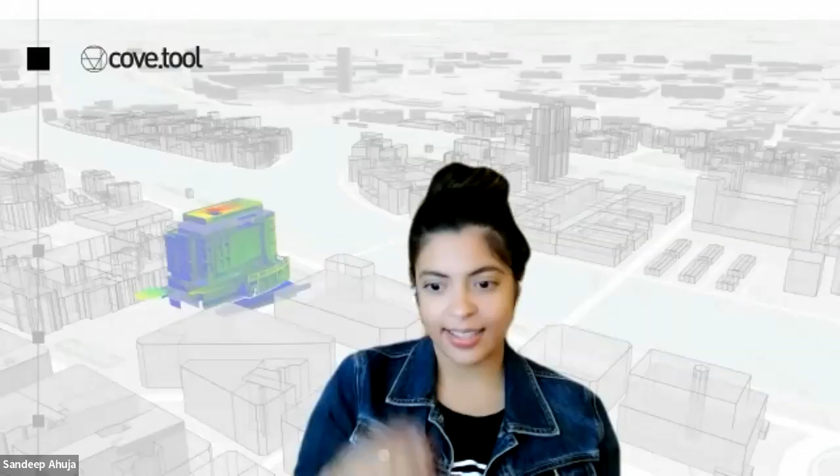Other than that, I've been reading a lot of the Harvard, not the business reviews, but the Harvard top 10 books, like guides to doing this and guides to doing that. Oh yeah, those are like my core books that I keep next to me, and I have to refer to them every now and then because they have so much gold in them. They're super condensed, yeah, those are fantastic. I have them bookmarked and I keep going back with sticky notes. Those are just a wealth of knowledge. I'm glad they put it together. So that's that, but yeah, that's mostly it.

I've not really watched TV, I'm trying to do less of that. I feel like there needs to be a book list for people who started out technical, like an architect like you or an engineer like me, and then have gone into being a founder. It's like, someone catch me up, it's probably an MBA, but I'm more of a books person than a school person. Yeah, but it's like an MBA in a book, right?

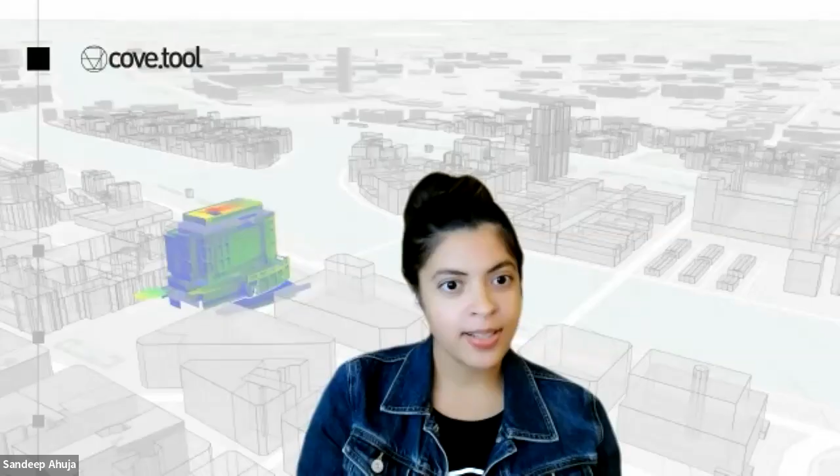Yeah, there's this really cool course from Wharton School of Business. Back in the early days when I was starting out, I was like, I need to be really good at understanding all of the numbers and the finance and the ins and outs of my business. I went online, and it's not like I did a certificate course since I didn't have the time, but I took a bunch of these online classes, and I thought those were phenomenal. I tried quite a few, but the Wharton ones were excellent.

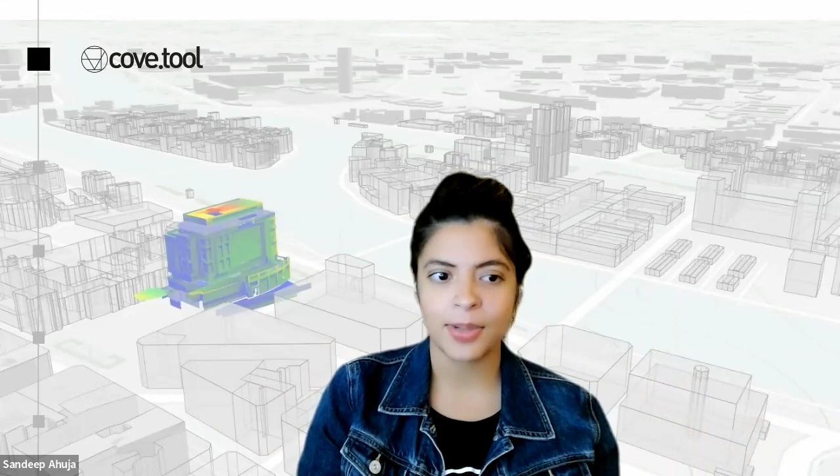All right, well if you dig that link up, we'll put that in the show notes as well. Cool, thank you Sandeep for coming on the show, this has been super fun. This is awesome, thanks for having me.